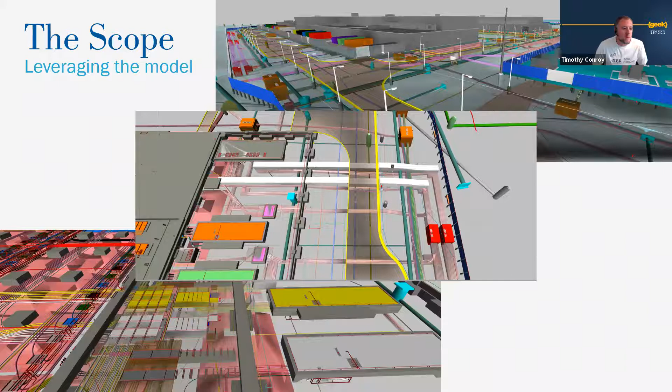So defining the scope. Like I said, we spend an exorbitant amount of time and money designing these buildings, creating models, coordinating to make sure everything fits, trying to keep sequence in mind, constructability in mind. But then we almost lose the model after we sign off. We create spool drawings, we create layout drawings, but we don't really take the model with us. So why don't we put it to work more, and how do we get there?

So the easiest way to get to where you're going is to have a roadmap. The goal is to define what these assets are, where they are, and communicate them visually, by defining assets by system, and most importantly, we're aligning expectations. The first iteration, so if you see it says version 2, the first iteration was just, we said to our trade partners that we're scanning stub ups, manholes, vaults, vertical bends, and we just described what

we're scanning. Whereas on version 2, because of all the confusion as well, is this an asset or is this not, we decided to spend a little more time and define it. Come up with a list, highlight them all. We put them into a system where there was a lot less questioning of, is this an asset or is it not? The hard part is taking CAD out into the field can also be a challenge, because you're not connecting the virtual environment to the existing conditions.

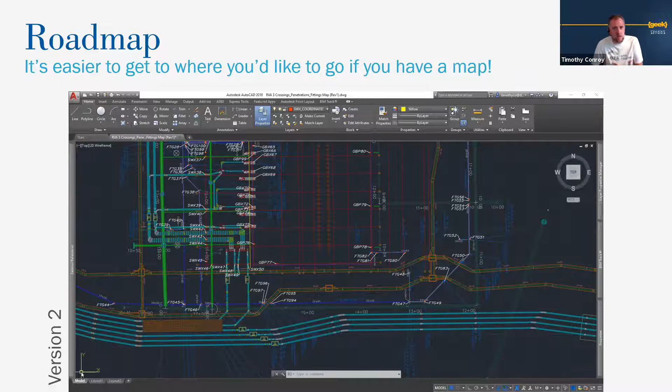So to increase the communication, we used SkyCatch, DroneDeploy. There are many out there. We happen to use SkyCatch on this one, but we took that crossings map, that asset map, and we overlaid it on the ground truth. This made it contextual. This made it easy to understand. The trades could go in, turn off all the layers except for theirs, and still see what we intended on scanning.

And they can also see, well, based on yesterday's flight, I'm getting pretty close. And so they can start being aware of what's coming and start requesting scans, so that we're not trying to jump through hoops, fight fires all day.

I hate to say it, but I'm not a firefighter. I don't think I would go into a burning building if it were in front of me.

But in this case, in construction, many times we are very reactionary. And so if we can get this plan communicated in a way that people can understand it, it allows us to be proactive and be ready for the scan when it should come.

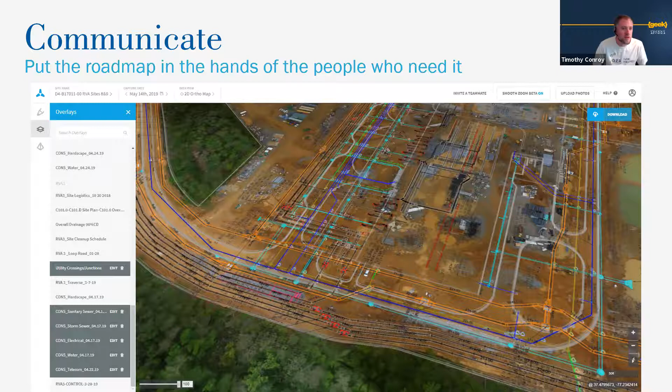So with the amount of data that comes with laser scanning, consistency is key. Searchability is key. If you can't pull up a scan in minutes, if it takes you hours to find that scan when someone asks for it, then you might as well not have it. The decisions in construction are made in real time and without having a complete picture. So if we can help close that gap a little bit by providing this information as quickly and as accurately as possible, we can help paint a more complete picture so that the decisions being made are using the latest and greatest information.

Because let's face it, if they don't have the information at the time they need to make the decision, they will still make the decision and we'll just have to deal with the consequences later. Indecision in construction can be more costly than an incorrect decision. So laser scanning, let's help close the gap.

So reviewing scans. So after we go out and we scan the asset, how do we review it? You know, there are scans today, even with the advent of AI, where it still makes sense to just review them manually. A lot of our exterior scans are hyper-focused on what the asset is. It's not a bunch of different systems. It's usually one system that is about to be crossed by a future system, or it will tie in later to a future system. And so it's very specific.

In this case, we don't use AI. We just take the point cloud into Navisworks and we do a quick review, document it, and move on. So not all scans today need AI. But the real challenge, as I mentioned before, with laser scanning is how do we balance capturing as much data as possible while still being able to review it without overwhelming the reviewer? I think this problem statement is where Avvir is really poised to help us solve that challenge.

So thanks, Tim. So hi, I'm Raffi, and I'm the CEO of a company called Avvir. We use reality capture data like laser scanning or photography, and we compare that reality capture data to your building information model to both quantify construction progress and evaluate construction quality.

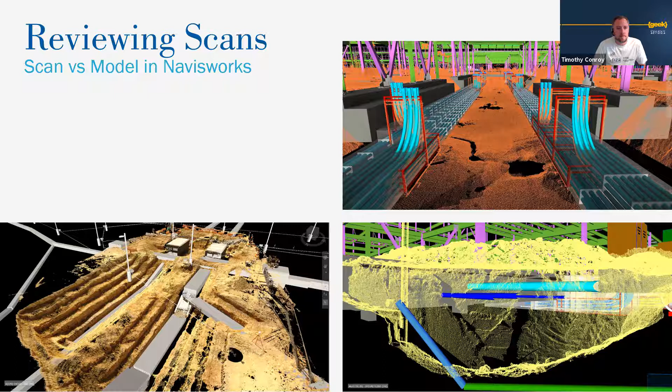Now, Tim mentioned a roadmap, right? If you want to get where you're going, best to have a roadmap of what that plan looks like. And that's what the BIM is supposed to function as. But I haven't actually used a static map in over a decade, right? I pull out my phone and my map has GPS. The roadmap today has GPS so that you can close the loop and not just have the static information about what's in front of you, but also know where you are relative to that space. BIM was always meant to be that kind of roadmap.

I actually came into construction through computer vision and working on computer vision and BIM. And I got acquainted with the history of BIM. Its inventors meant for it to be a digital twin of a building that would serve the building not just during the design phase, but during the construction and even the asset management phase of a building's life cycle as well. Historically, BIM never got there because, like any plan for a fast-changing reality, it became out of date very quickly, and BIM was difficult to keep up to date.

In the last 5 or so years, reality capture, particularly laser scanning, has made it possible to more directly compare your reality to your initial plan. But like Tim was just saying, if you engage in that, you'll still find it pretty overwhelming very quickly. The amount of data and the number of decisions you need to make as to what's truly as built versus the design, where things are clashing, where they're not, and what matters. And so that was the primary problem that Avvir wanted to step in and solve.

How can we take this waterfall of data that's coming at a VDC team or a project management team and take that workflow off of their plate? So Avvir ingests the reality capture data, it ingests the BIM, and then automatically does that comparison and analysis so that we can then turn over hopefully an updated BIM, or at least a BIM that's highlighted with all of the issues, back to the VDC team and make their lives a whole lot easier.

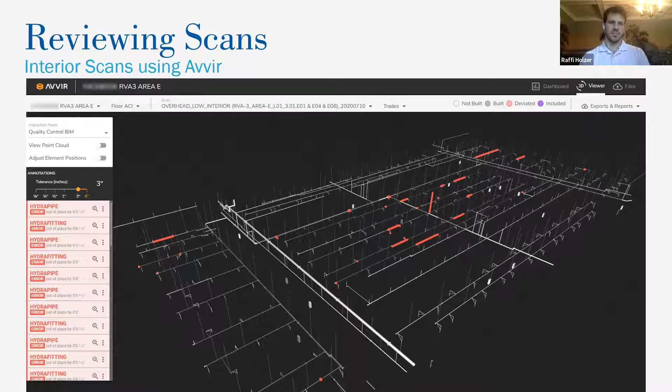Yeah, I think the real benefit to Avvir is how do we reduce the noise? There's stimulus all around us. And many times we make these mental shortcuts to help us deal with that. Avvir helps us to focus on the problem and allows us to spend time solving the problem instead of spending all of our valuable resources just simply finding the problem. Brings it to light, lets us focus on solving, not finding, reduces the noise.

So bringing this back to how we're leveraging Avvir today in our workflow, I think we've been working with Raffi and team for probably close to a year now in conversations, and probably the last 6 months or so in production. And so we've seen a lot of improvement from when we just had this idea of how do we limit the amount of time we're spending to do these scans or to do these reviews, but still gaining all the value.

Luckily, I don't know if the stars aligned or what happened, but Raffi reached out to me on LinkedIn, and that's how we got connected. And I'm really grateful that he did reach out, because it's been a blessing in that now we can spend time capturing, hopefully not in the future, but right now we're spending our time to capture. We then leverage Avvir to do the review for us. We then step back and then look at the findings.

So interior scans, where the congestion is much greater and there are multiple trades in close proximity, that's where the opportunity to leverage Avvir or leverage AI is much greater. The ability to compare the scan by having the deviations glowing in red as I'm showing on my screen. Like I said, this allows us to spend time figuring out how bad is this problem, not where is the problem. So it allows us to spend our resources on solving, not finding the problem.

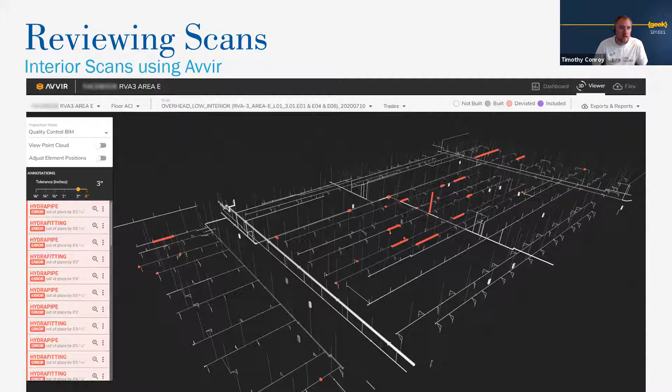If there's anything getting close to 1 inch, then maybe take note of it, but we don't need to do anything about it necessarily. When we're between 1 and 3 inches, it needs to be a discussion. We need to start talking through it because we're getting closer to that critical level. The critical level is where we have to get the client involved. If there is a deviation that's greater than 3 inches, the client needs to weigh in to make sure that we're not just making a decision in a silo that may impact future builds that they may have in mind

for retrofits. So we do have the ability in this platform to choose between 1 and 3 inches, or even 6, or down to 1/8. So it allows us to tailor that message to the audience that it's going to. And this is where survey control is paramount, because if we can't get our scans to align to the model within a 1/2 inch or even a 1/4 inch, which is survey grade, how can we feasibly or truthfully say what is wrong? Is it the scan or is it the system?

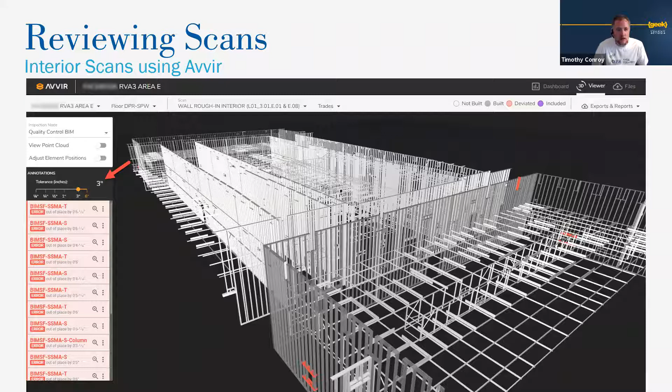So there is a push for it, as on many jobs. The client's asking for us to push things a little further to see if we can get a little tighter. But we just got to be careful about where we push back and for what reason. So bringing this back to the model, Avvir gives us the ability to export a deviations IFC. We can export the as-built IFC, but more focused is we can export the deviated elements into an IFC model.

This allows us to bring it back into Navisworks or into your model viewing platform of choice. For us, it's Navisworks. And the real benefit to that is we can look at downstream impacts. We can say, well, if this piece deviated and the rest deviated equally, does that cause any downstream impacts? Are there any concerns about proximity or other things that may not be shown in the model? And that's where the human brain, I think, really comes in. Today, computers are getting there. Maybe not on construction, though. Can they answer questions like that?

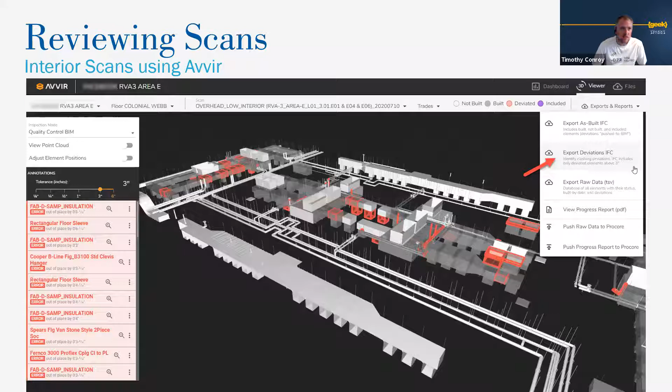So the ability to export that IFC and bring it back to the coordination platform allows us to not add one more platform, one more source of digital or technology fatigue, but instead bring it right back.

At the end of this, finding these issues is only part of the problem. We also need to track them. If we're not tracking these issues to resolution, why are we even finding them? The follow through is what really makes the difference.

On this job, we use BIM Track because of its integration into Navisworks. So we can screenshot it, we can have a conversation about it, we can assign it to the party that needs to address it. If it is a field issue that needs to be corrected in the field, then they will add it to BIM 360 Field because that's their platform of choice. And so the real goal here is to get the information in the platform that the audience is using.

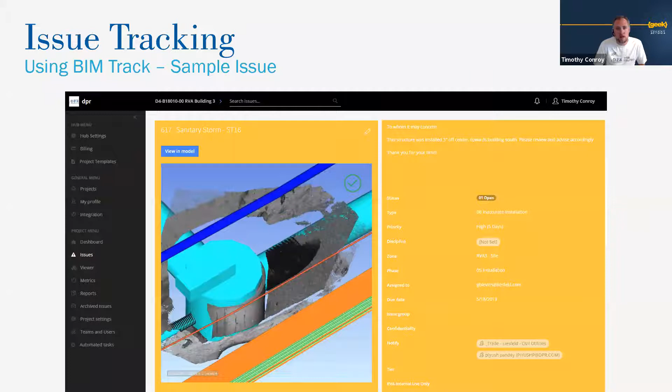And then lastly, keeping score. So we have a saying that if you're not keeping score, then it's just practice. And we don't want to practice. We want to keep score. We want to get better. And so like I mentioned, if we can smell the smoke before there's fire, we can react to it. We can put out the fire before it's ablaze.

And so as many people on the call are probably using Power BI, we use it for deviation detection or deviation analysis to say, are there hotspots in the building that are glowing red? If there are, like the exterior one shown in red, do we need to get back, work with the design team to say, well, why is it a higher congested area? Can we use this data of where we're finding deviations? Maybe there are constructability issues. Maybe there are sequence issues. Can we bring that information to make the design better? And the only way to do that is to track and to keep score and make sure that we're all working in the same direction.

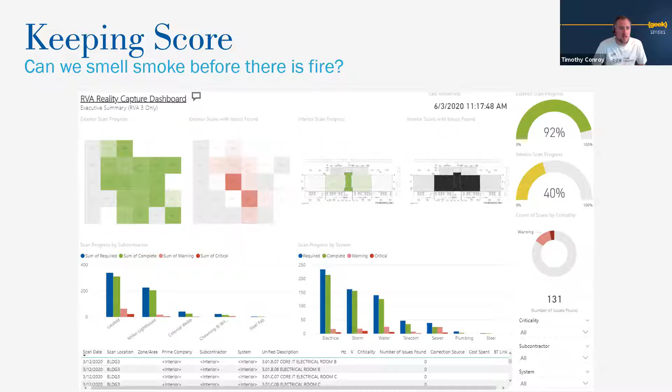I don't know who said it, but there's a saying out there that those who don't study history are bound to repeat it. There's nothing worse than repeating your mistake over and over and asking the client to pay for it over and over.

So you may be asking, how long does it take us to go from scan to deviation report? Well, we've committed to our trade partners that we would do this within 24 hours. We can't ask them to slow down their production schedules to allow us to do this unnecessarily. So we've come to the agreement that if we can do it within 24 hours, we're slowing them down for a good cause, but if we go beyond that, we're unnecessarily slowing them down.

The contractors do have the ability to say, we feel that we are correct, so we're going to proceed at risk and bury the system. We do say though, if it's being buried by concrete, you must wait for us to let you know whether or not we saw any concerning deviations.

The goal in all of this and the real push behind the 24-hour turnaround, it goes back to that statement I made earlier about how do we decrease the number of decisions made where the person that is making the decision feels like they don't have a complete picture of the situation. This is just one more lens that we're looking at those problems from to try to have a better outcome.

So now what's next for lasers or for reality capture? That we can capture more, review more. There's probably more use cases out there. We can do it faster with platforms like Avvir or like Spot or Skydio. Maybe we fly a drone inside to capture nightly on high bay spaces where a laser scanner would either have to be elevated or we lose fidelity. And we want to do this for less.